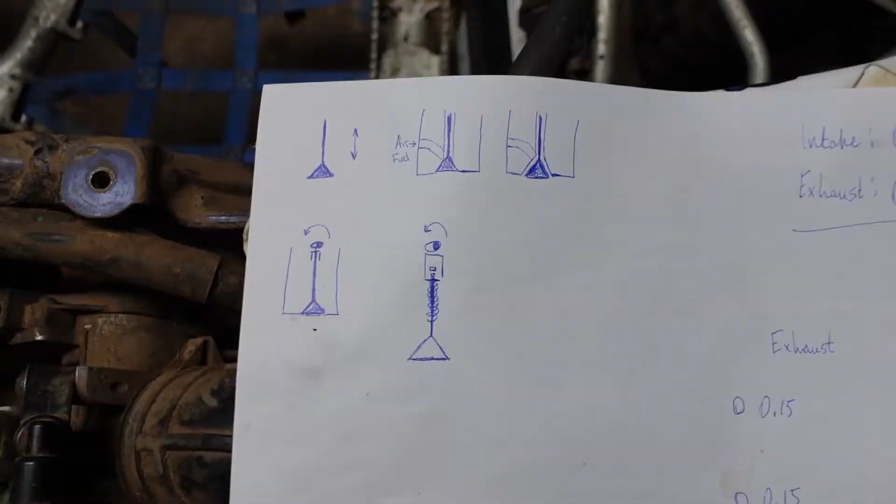Alright guys, today I am doing valve clearances on the Suzuki LTR. I'm going to show you how to do it and what steps I go through doing it. So we're going to just jump in this straight away. So I already recorded all this on my phone and then remembered that we have the camera for it.

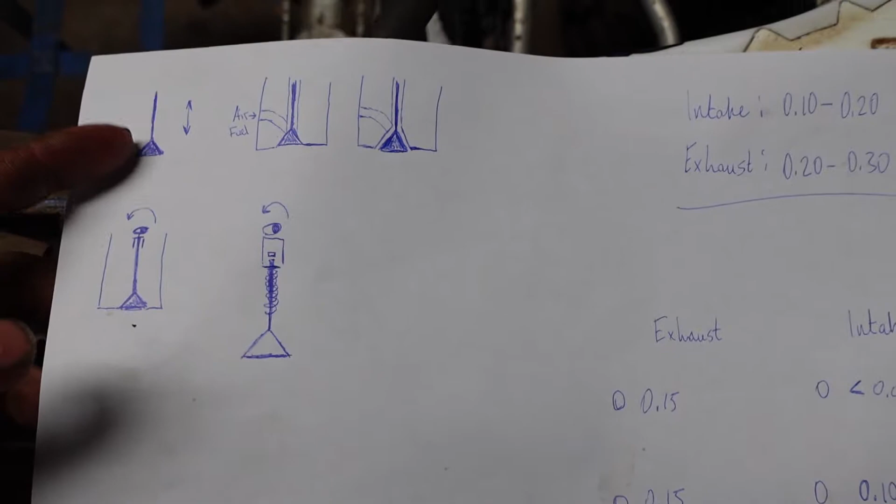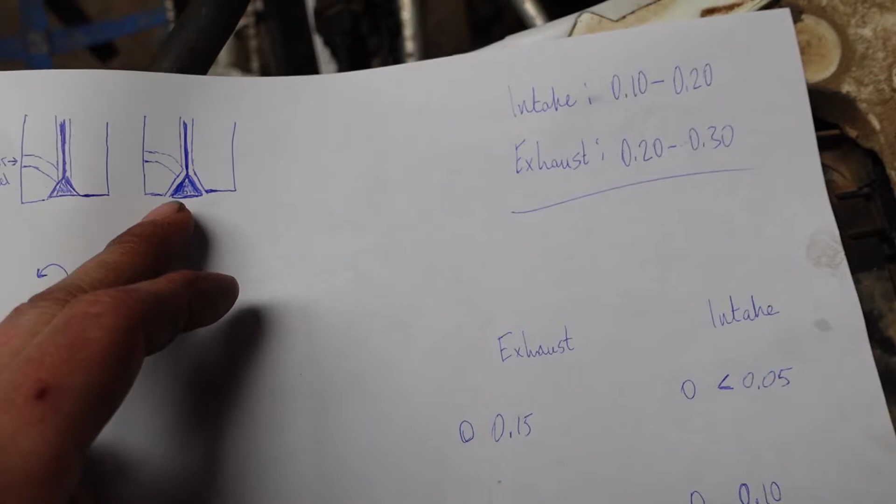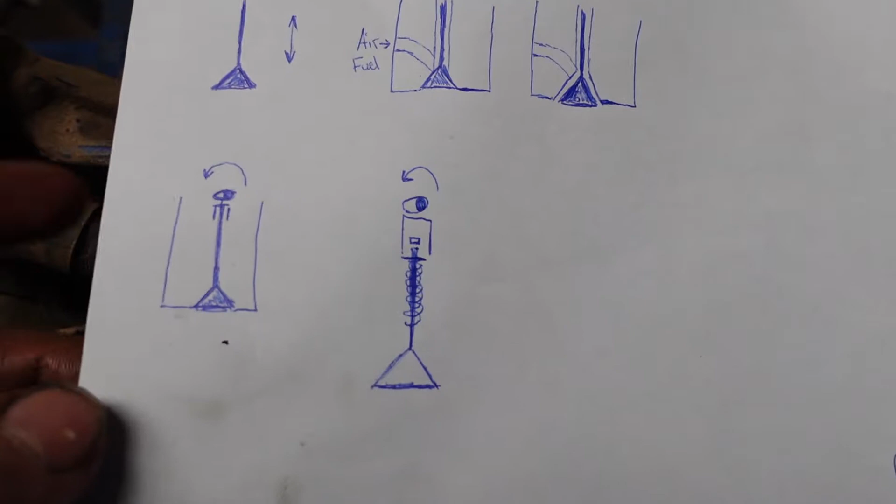But more or less how a valve works, goes up and down. Whenever it's down, it sucks in fuel and air, your piston sucks in the fuel and air mix. And then whenever it's down, obviously it opens up that port there. And then what drives your valve is the cam. Your cam comes round, cam hits the bucket, pushes the valve down, opens it, spring pushes it back up.

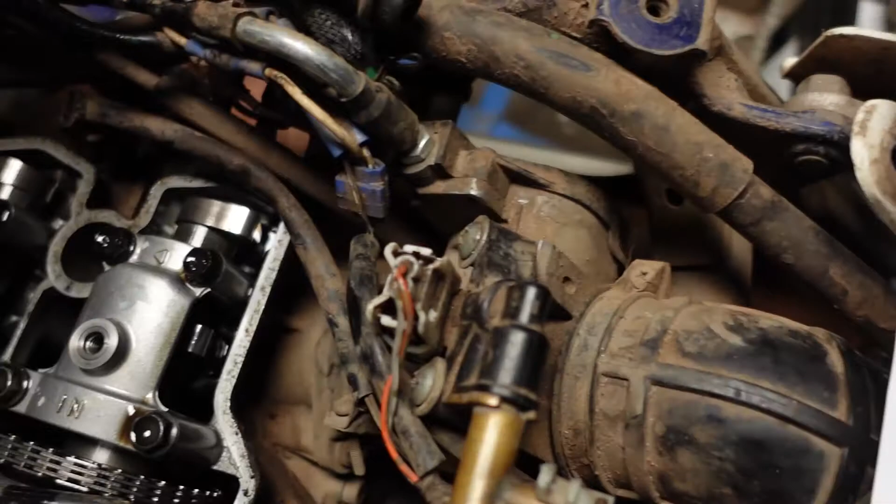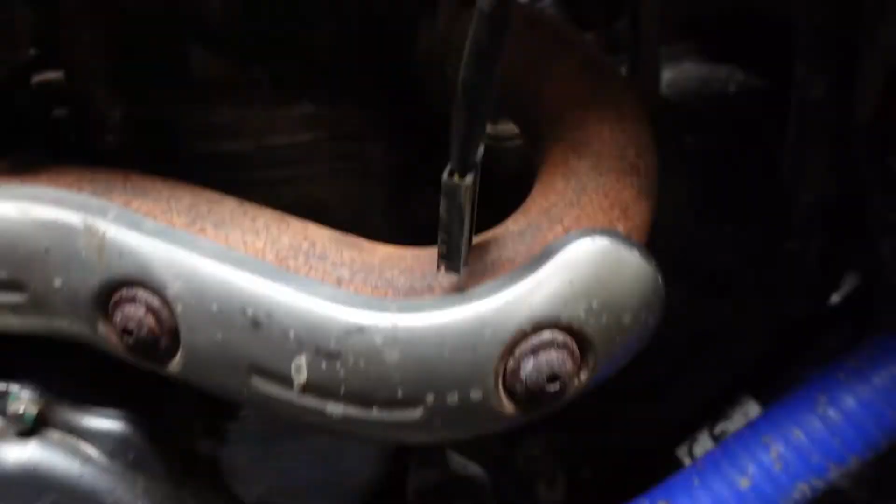But this is what we're dealing with here. This is your cams, there and there. Well, that's the cam caps, but the cams are down below. What they are is like a lobe. So I'll try to show you here. I don't know if you can see it, but you can kind of see it there. They're like an oblong lobe, and they are what are responsible for opening and closing your valves.

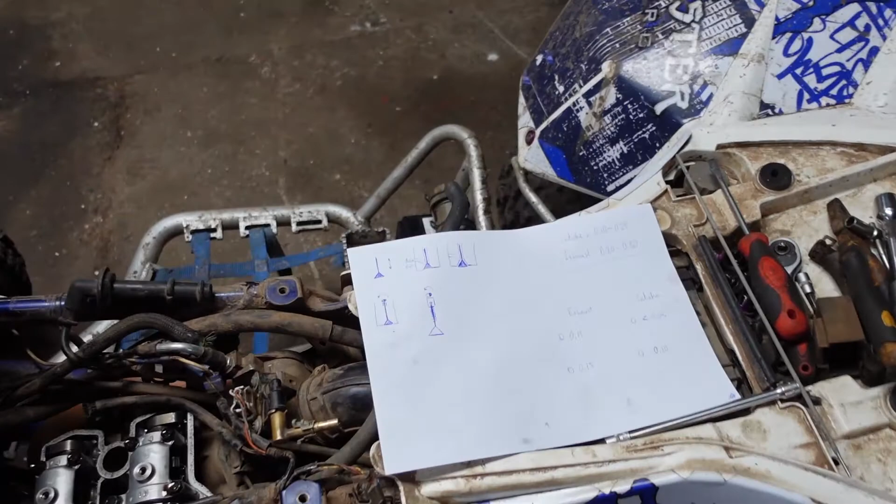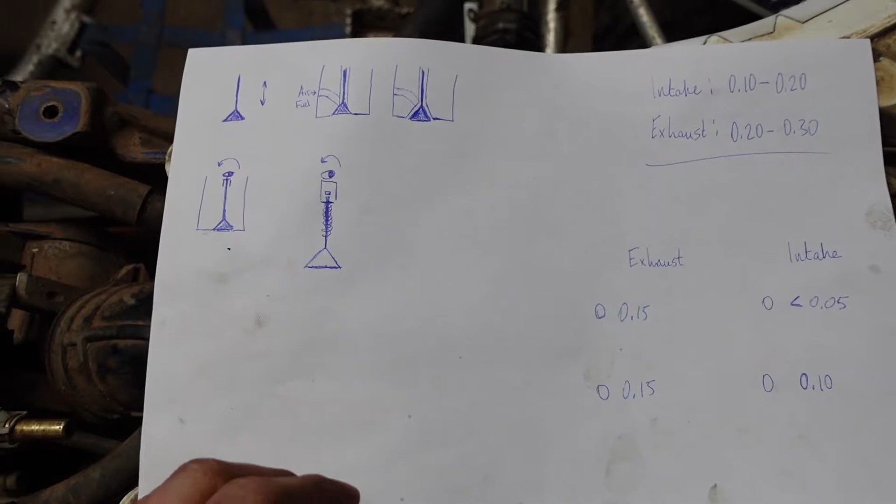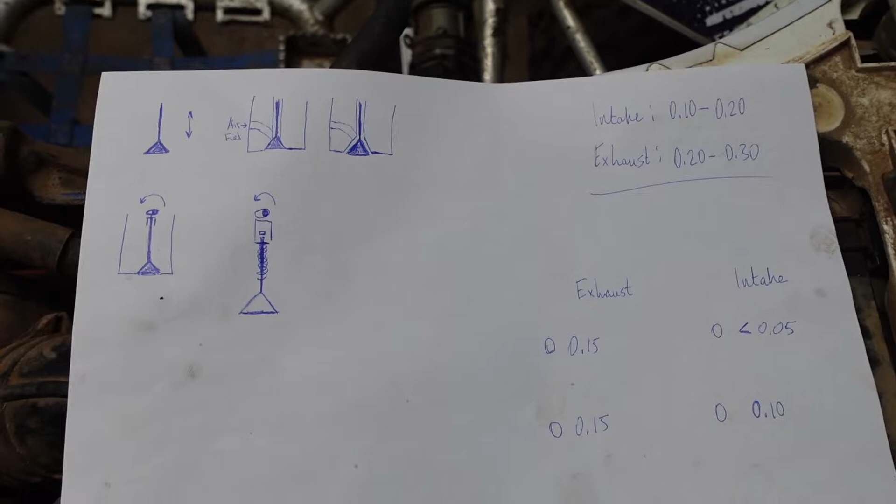But whenever your quad is constantly running high revs and whatnot, your valves are going to wear into the valve seats. So you can imagine over time they're slowly moving up, and the more they move up, they're going to get tighter to the cam because they're wearing into the head. Now it's not a couple of mil here, we're talking 0.10 or 0.05 or 0.2 of a mil, like what they're moving.

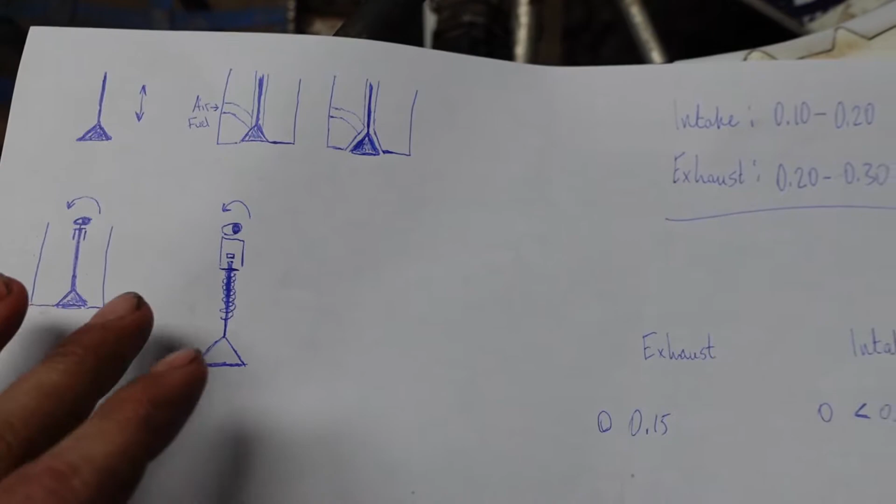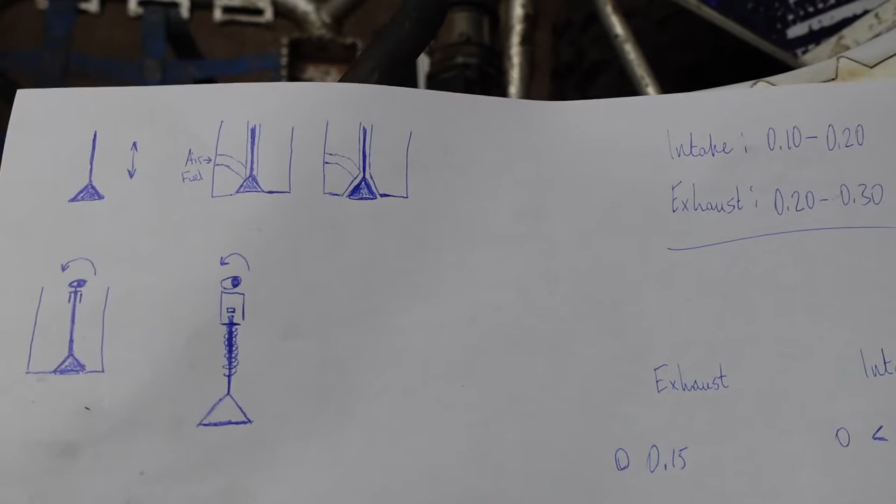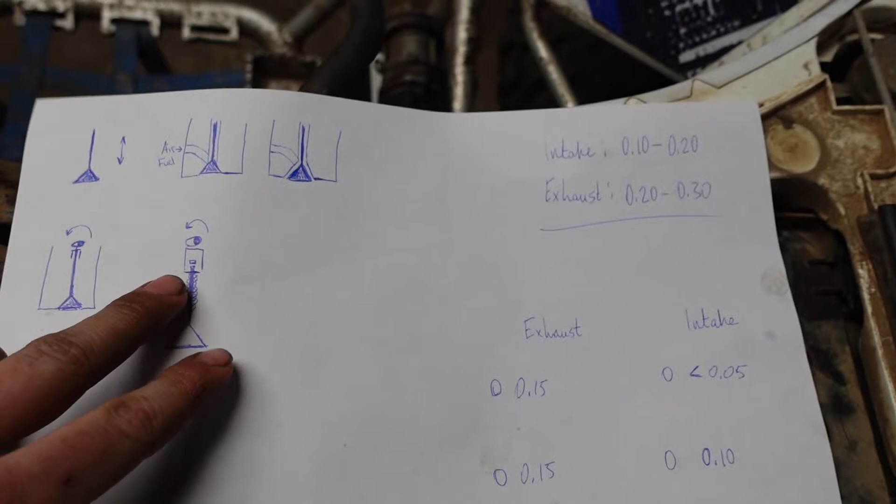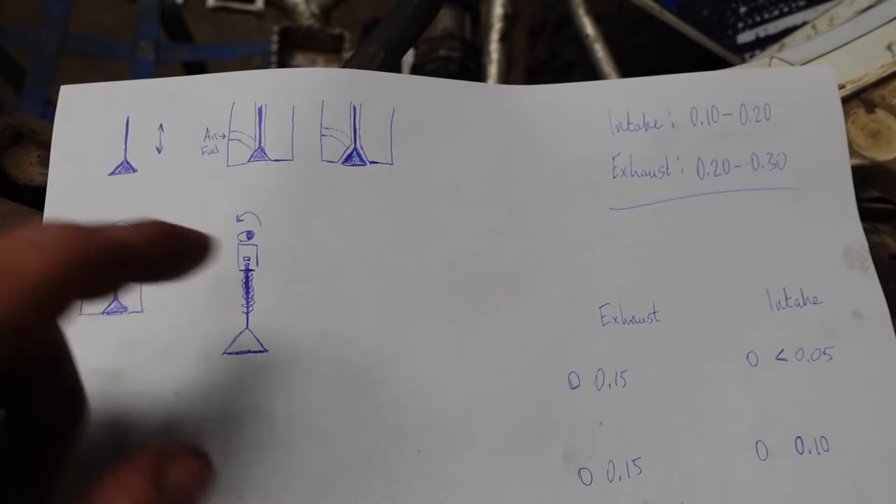But more or less what you do, because you need a bit of clearance between the valve and the cam, or the bucket and the cam, to do with heat and whatnot, and so you're not pushing it the whole time. But what you do then, as your valve wears, you need to make the gap wider again. So there's a shim on top of the valve, it's inside the bucket. You need to make that smaller, brings it lower, brings it down. I'll show you whenever I have it out here, but it's kind of hard to explain, and I'm not the best person for explaining things.

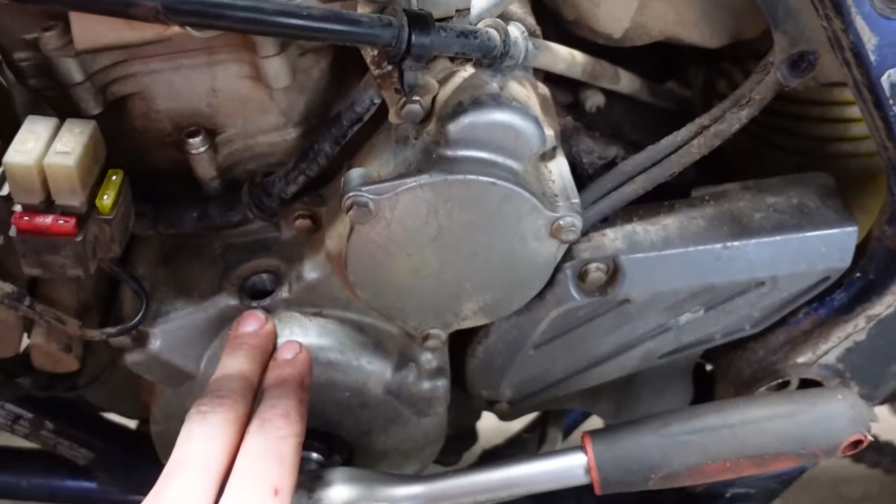But you need to have your top dead center found on your flywheel. You just line up the T down there, and then the cams have a dot there, lines up with the top of the head, and a dot there, lines up with the top of the head. So I'm going to pull them out here and I'll show you how I get on.

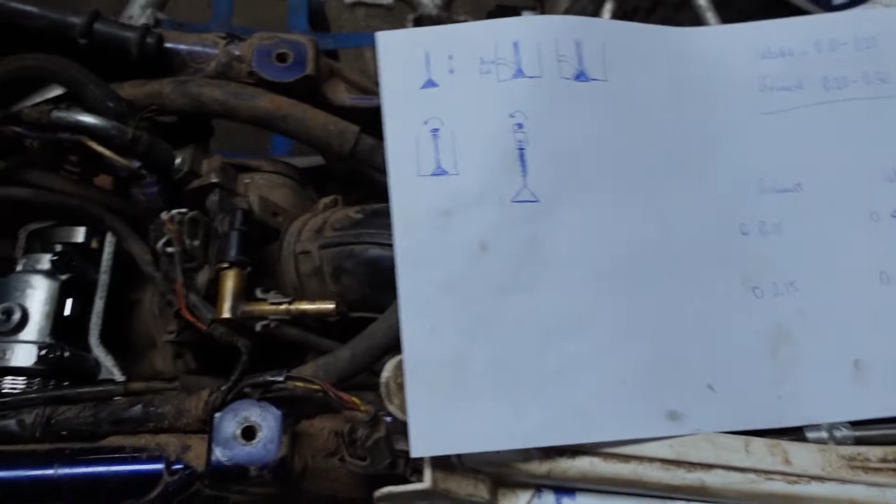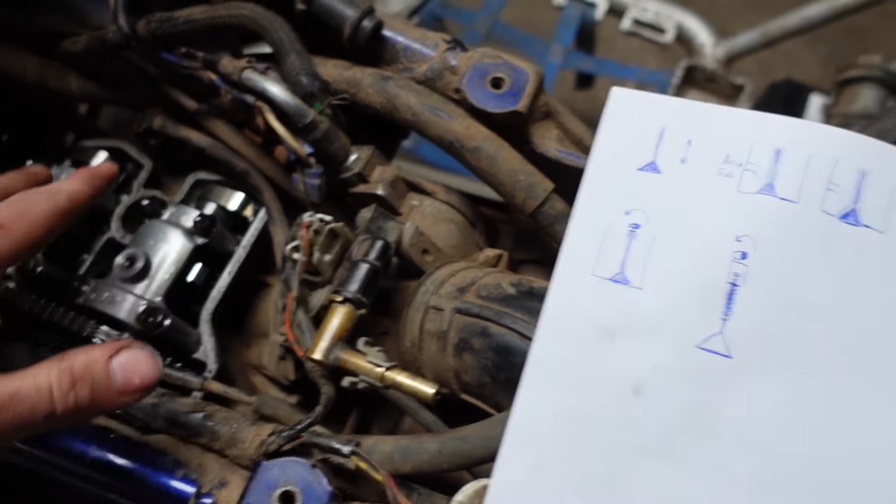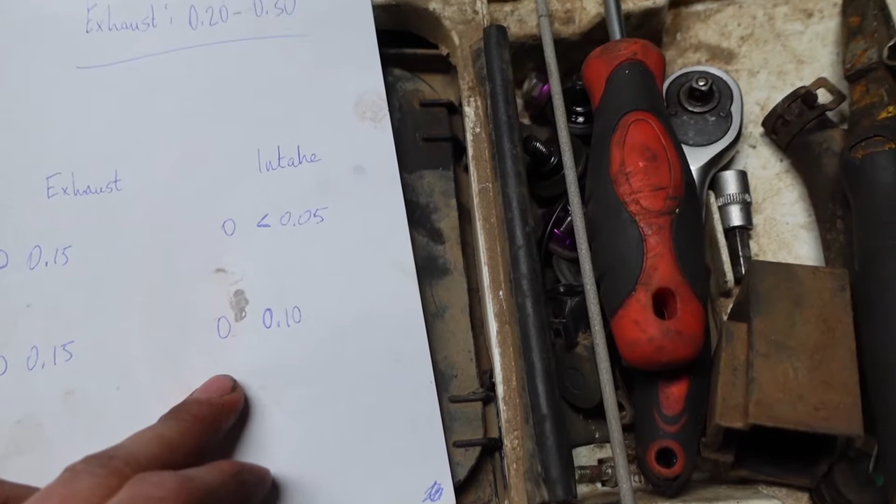Oh, and the other thing I forgot to mention, I already measured. You use a feeler gauge and you measure between the cam and the bucket, just slide it in, and I measured them. The intakes are this one, that's more or less just the way I have them drawn is the way they are. So this one is more or less fully closed. I couldn't get my thinnest feeler gauge in. This one is 0.10, which is inside the specs, but it's as tight as the specs give it. And the two exhaust valves are 0.15, which is out of the specs.

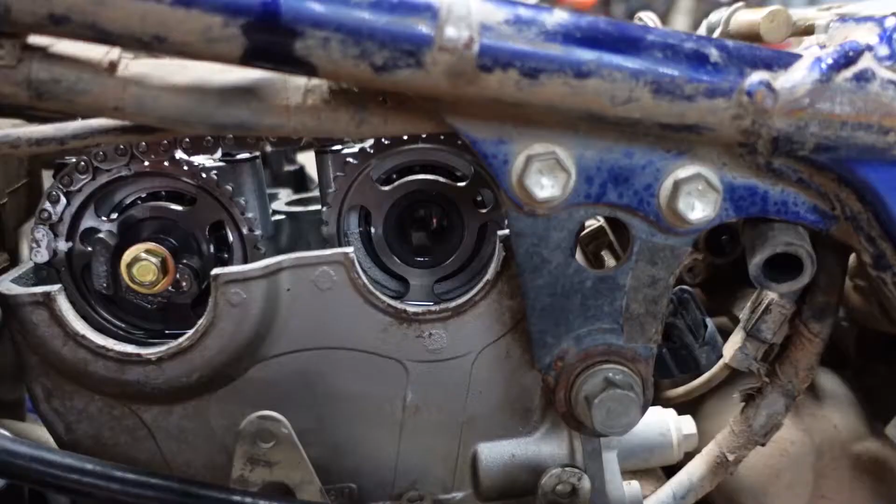I just put a bit of Tipp-Ex on one of the chain links and one of the teeth that it corresponds with, and the same over in that one up there. But if I don't let that chain drop or slacken, if I keep it tight the whole time, then them links just need to go on the same place again, more or less. And say if the marks rub off or whatever, you still have the dots anyways to line up, so you're not stuck. Took the tensioner out.

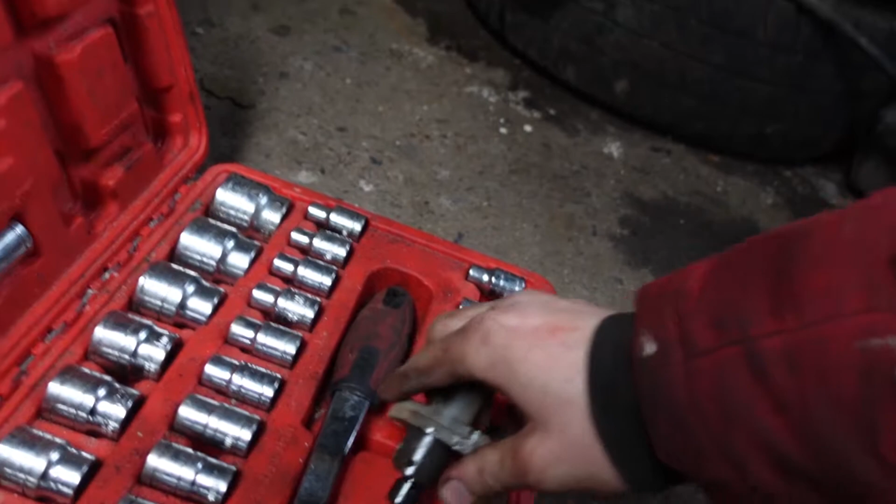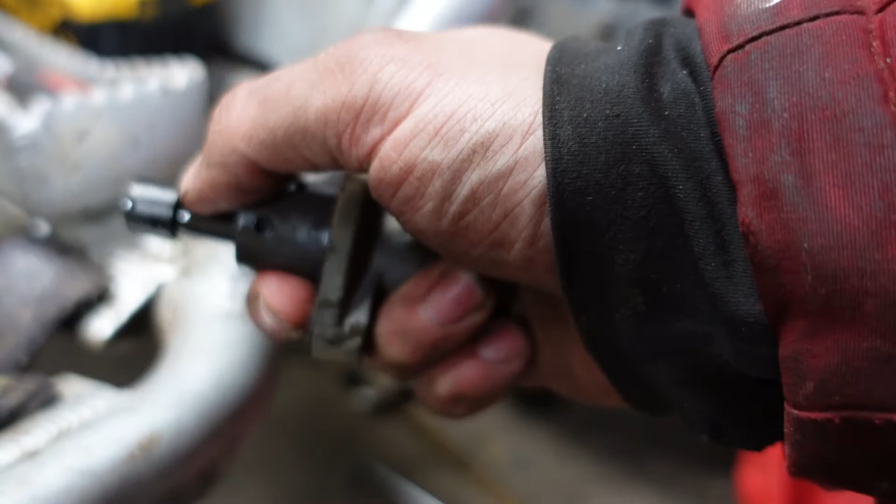This is the tensioner. So the way it works more or less on these is the spring pushes that out. It's like a wee ratchet, so I can pull it back with my finger obviously, but spring pushes it out and it can't go back in. It's actually a good design. Polaris is a bit different, but yeah.

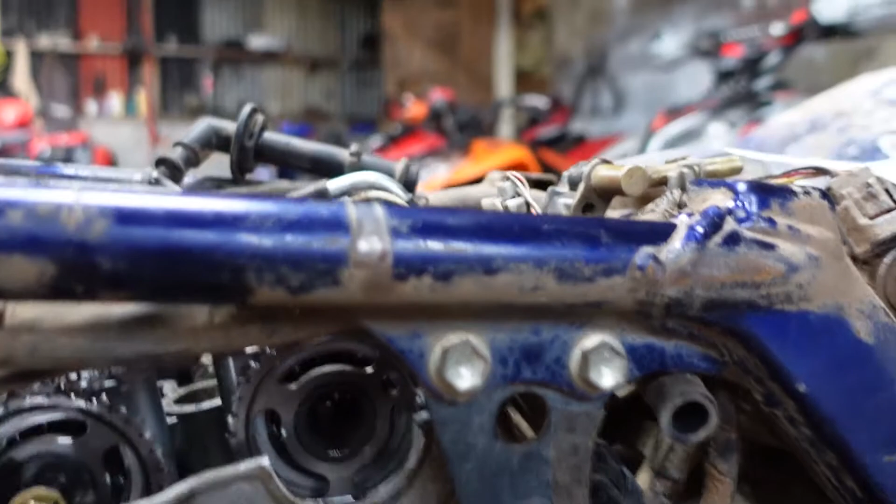So I loosened all the cam cap bolts as well. I just loosened them with the ratchet first, and now I'm going to take them out with a gun. So this is more or less just winding them out for me. It doesn't have to break them or anything.

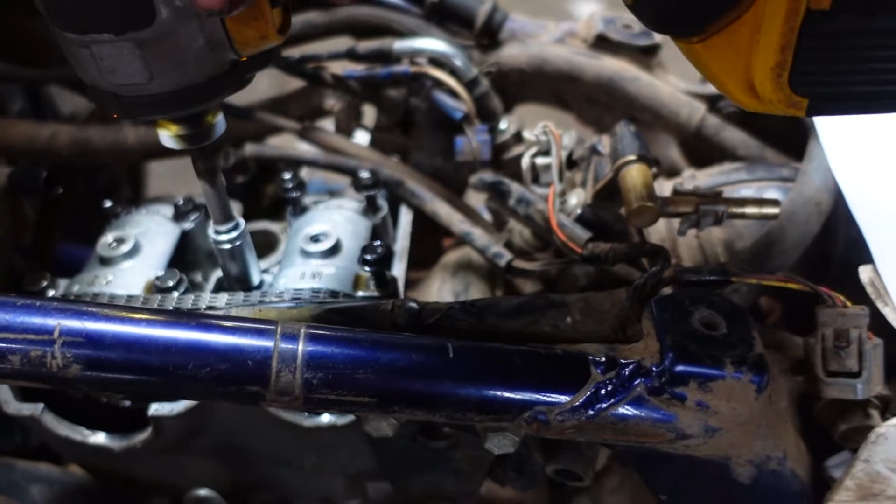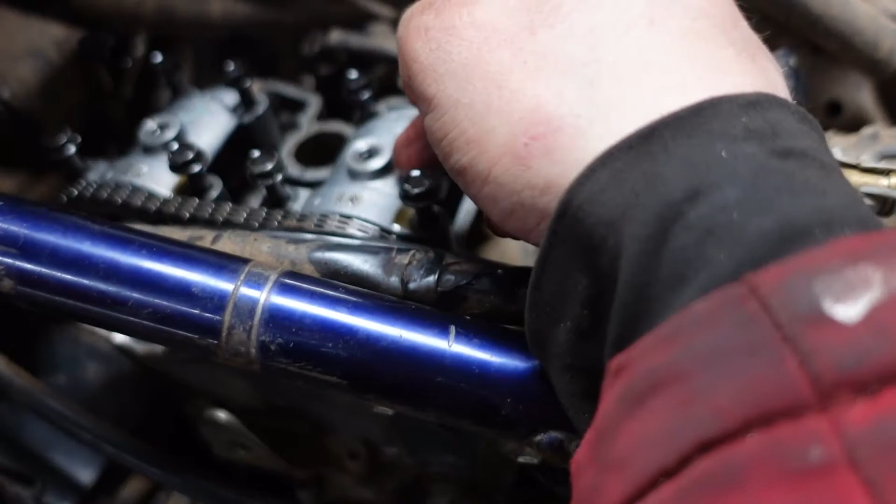So now I'm going to pull out the cam caps, and just whenever you're taking these sort of things out, there's bearing stops underneath, and you don't really want to drop them down anywhere. So I'm going to use two hands for this, and I'll show you when I have them out. I'm going to get a magnet now and lift them out, and I'll show you the shims then. And see, for the timing chain, that hasn't moved from the bottom gear. I kept pressure on it the whole time, and then I just put a bungee cord up round, and that won't drop.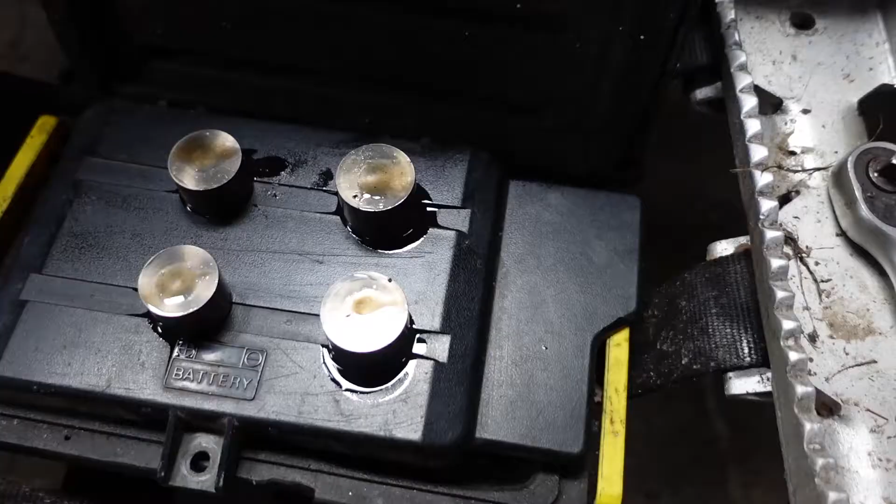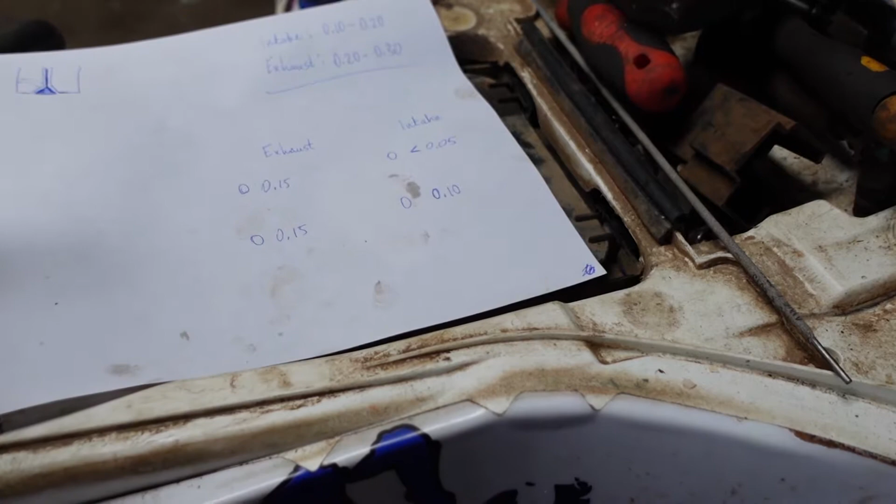Right, that's the buckets out, and that is one of the shims. Just a very small piece of metal. Whenever you have the buckets out, give your measurements in that order. So keep your buckets in that order, because if you mix them up, everything's going to be backwards. This here isn't too bad. The two exhausts are the same, so it wouldn't really matter, but I'm not going to mix them up anyways.

Right, so I put in the new shims and put it all back together, put on the tensioner, turned it over about 15 or 20 times, let everything settle in kinda, remeasured them. These two are 0.20, which is where they need to be, and these two are 0.30, which is where they need to be as well. So I'm happy enough for that.

Gonna throw the rest of it back together now and see how she goes. But regardless of if this doesn't make her run better, it still needed to be done, because that's just a factor that wouldn't help. So I'm gonna throw it back together here now, and we'll see how she goes. Right lads, that's it mostly back together now. I must just throw in the spark plug, the throttle position sensor, fuel pump, and what else? And the tank has to go on, and we'll see then what happens.

Right lads, so finally got the tube for the tyre. That is in there now. I had to go to Letterkenny to get that. Got it yesterday, and we got the tube back in. And then I just threw it together with Dad. He helped me just get on the back wheel again. There was a few bits that needed cut and kind of modified a bit, but the rest of it I threw back on. Alfie obviously likes the bike too.